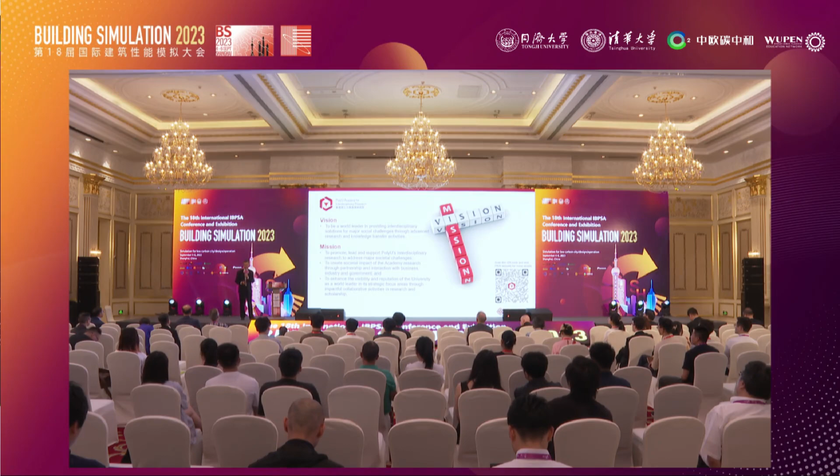This reminds me of about 35 years ago, when I was at Burgers' lab at Delft University of Technology. I asked my boss, since Burgers is a very famous scientist in fluid mechanics—the Burgers' equation—but my boss said no, that's wrong. He is not only famous in fluid mechanics; he is also famous for making a very special career. For example, he decided to teach at the University of Maryland when he was 60 years old. That really impressed me, and that's why I followed his step. I moved to Hong Kong, and I'm much older than he was.

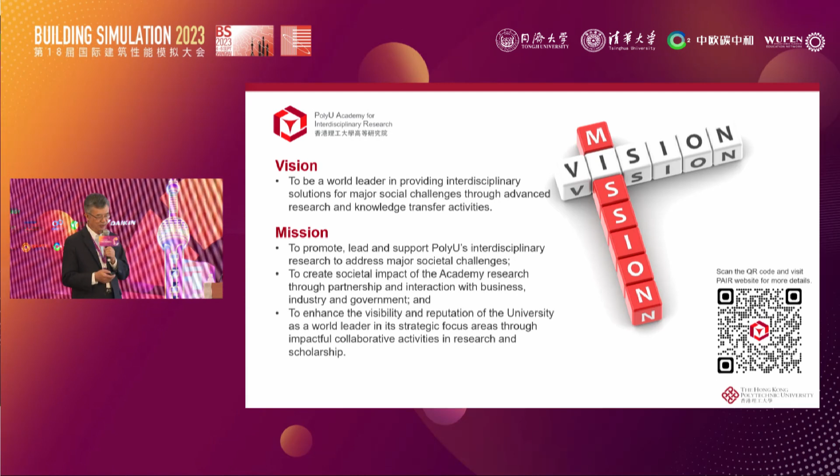So what we call PAIR tries to work on a number of different issues. Under PAIR, we currently have 11 research institutes and 6 research centers. We work on cities, advanced technologies, and well-being and health. We don't try to understand the beginning of the universe—that's often considered the problem for the University of Hong Kong. But at PolyU, we try to address the basic needs of human beings.

We say this in Chinese: 衣食住行 (clothing, food, shelter, transportation). At PAIR, we have over 500 senior researchers, and our research revenue in the past academic year was over 600 million Hong Kong dollars. That's quite a lot of money.

Now let's get started with my main talk today. I think many of you, I just met about more than four years ago, and the main reason we know each other is due to COVID-19.

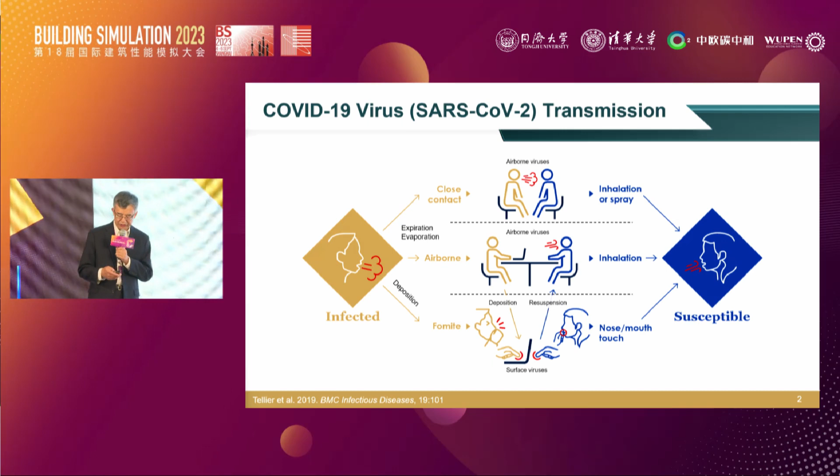If you look at COVID, in the beginning the World Health Organization and US CDC published results like this. They said, of course you should be very careful, but in the beginning they often believed that droplet transmission was the major issue. But thanks to the effort of scientists in the building science area, led by Professor Lydia Morawska from Queensland University of Technology, and Don Milton from the University of Maryland, they worked very hard to convince the World Health Organization and the CDC. As a result, a year later, these organizations changed the definition of how COVID is transmitted.

You can see from the US CDC in 2020, they changed it to say transmission is mainly through respiratory droplets produced when an infected person coughs, sneezes, and talks. So the aerosol format became a secondary effect, and that's why we believe we have a major key role here, because many of us are working on HVAC, which concerns air.

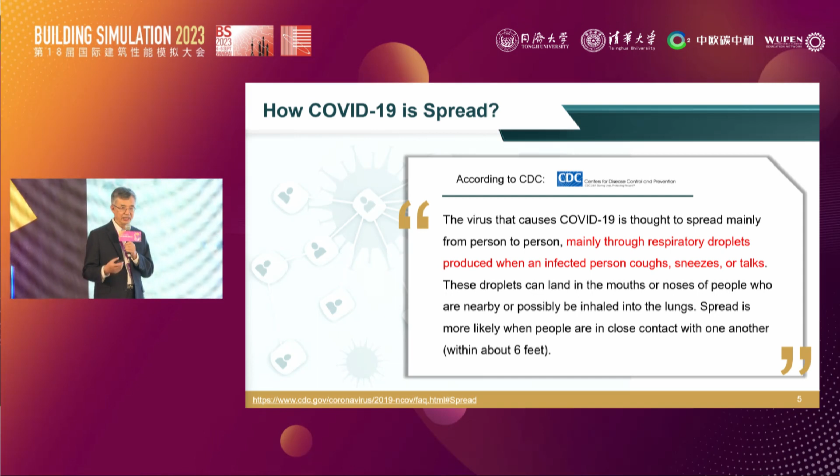Now, if you look at how the COVID-19 virus is generated, CDC already mentioned a few ways, and to be complete I'd like to list them. Of course, coughing is very important. Even in China, when restrictions were lifted, you heard coughing everywhere, and that was really a major issue. In addition, when people talk, that also causes a bigger problem. I believe in the beginning in Wuhan, many people got the disease because they had a big feast—they ate, they talked. Although there was no coughing at that time, there was still a big environment for transmission. Then breathing also releases quite a lot of virus. These are the three major ones CDC mentioned.

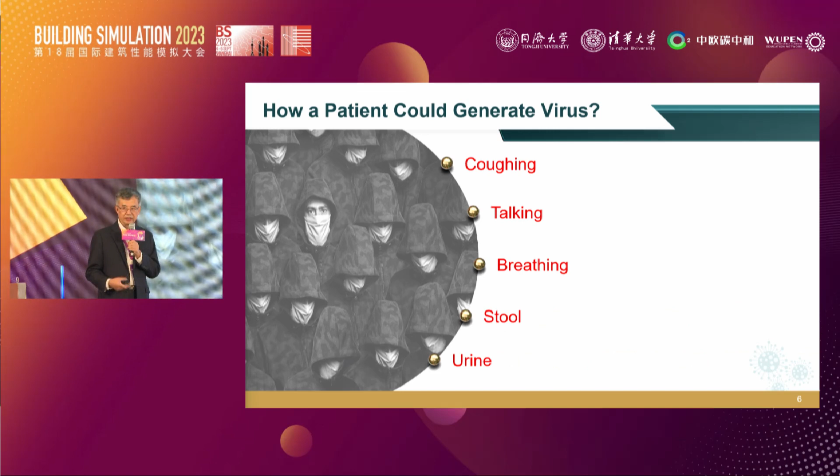In addition, virus has also been detected in stools and urine. So today I'm going to look first at the size of the virus, and then we can see why talking, coughing, and sneezing are important.

This slide shows a number of very common viruses we have. The one I circled there is SARS. So SARS started in Hong Kong in 2003, 20 years ago. And 16 years later, we have COVID, which is a similar type of virus.

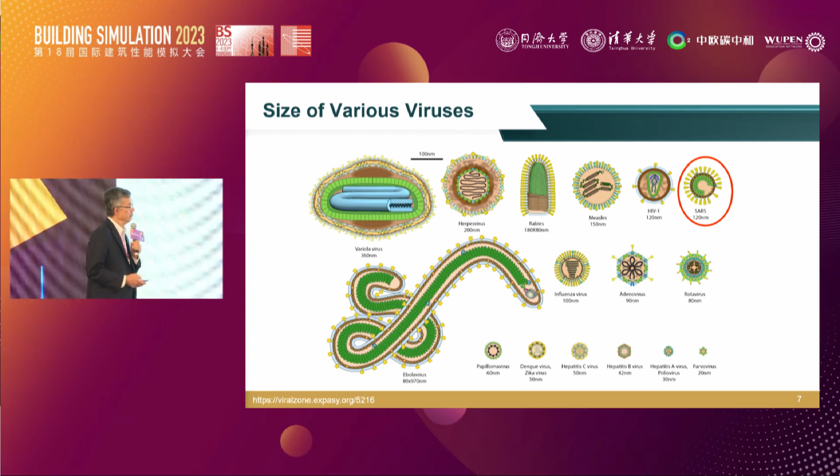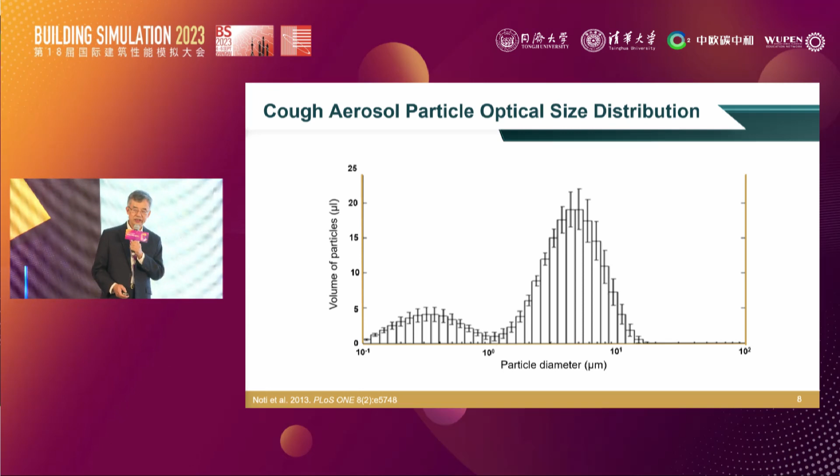It's very small, only 120 nanometers in size. But if you look at a typical cough, with particle diameter on the horizontal axis and volume on the vertical axis, you can see the majority of particles are in the size of 1 to 10 microns. That's very big because the virus is only 120 nanometers. So any size particle we generate contains a lot of virus, and that's why transmission is very easy when your virus is so small.

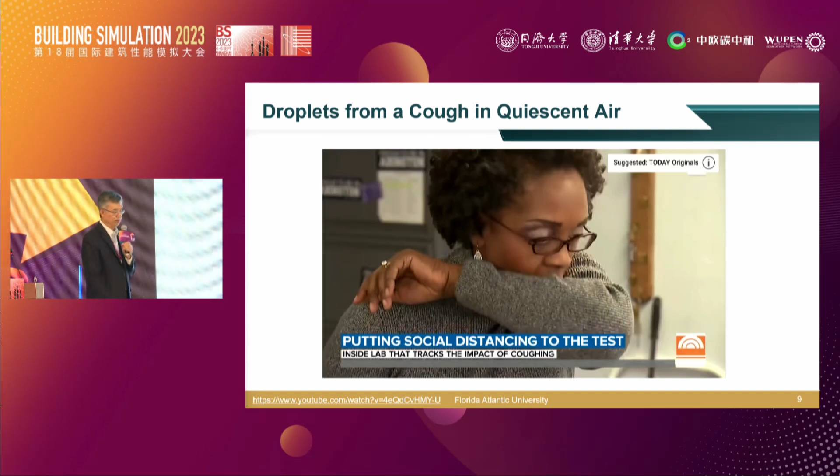Now, in the early days, this is just from TV in the US. Can somebody click that for me? Okay, this is about the cough, right?

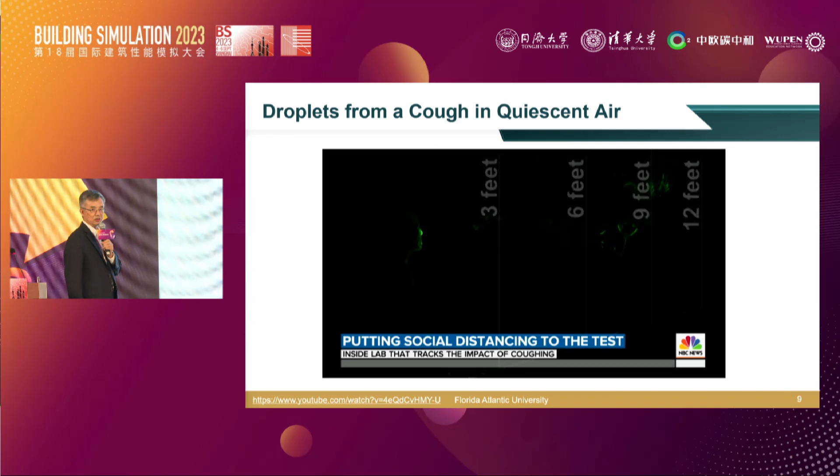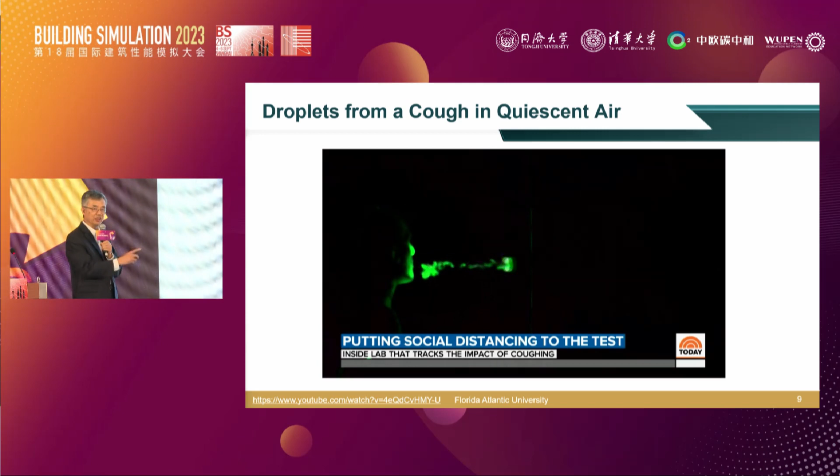In Florida Atlantic University, there was a study showing that if you cough, typically the droplet can go about 6 feet or 2 meters beyond. This is how the US CDC decided we need to maintain a social distance of 2 meters. But that's only for a very normal cough, because sometimes the cough isn't so strong and doesn't go very far, but sometimes the cough can be very strong and can go much further than 2 meters.

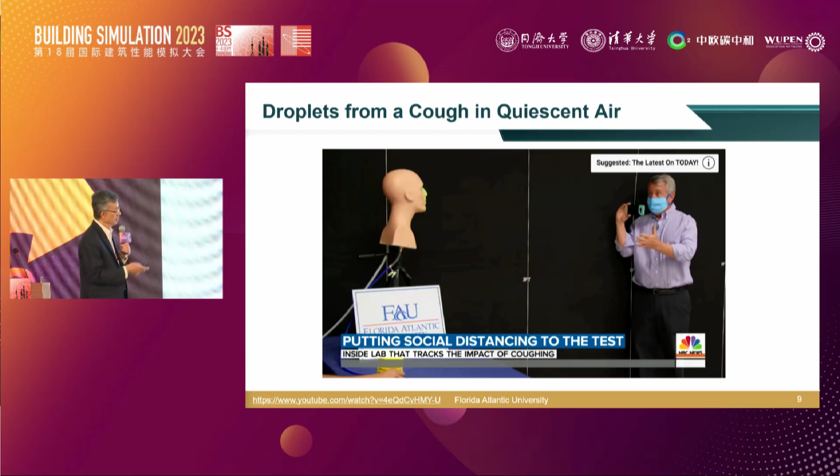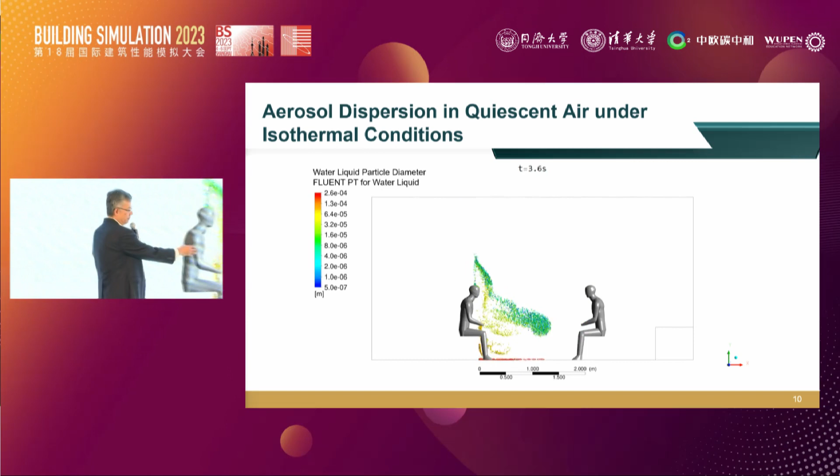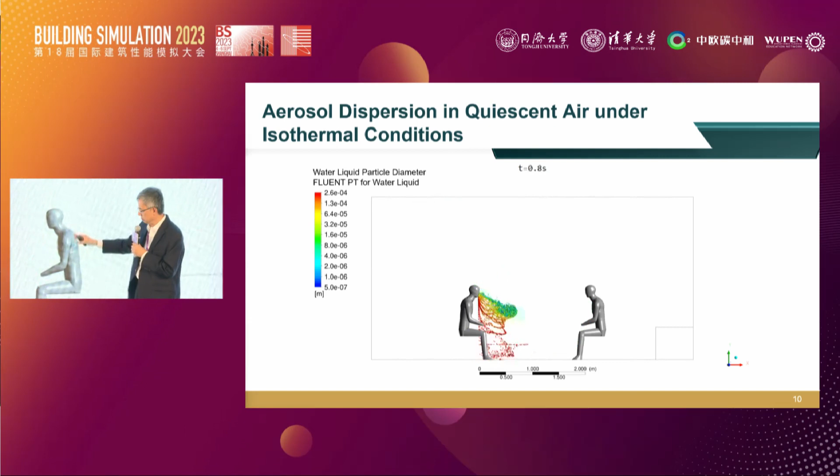So we tried to do a simulation using computational fluid dynamics, or CFD. We have one person here cough, and these different colors represent different particle sizes. Very small ones, because of thermal buoyancy, just go upwards. Larger ones, about 10 microns or so, can travel about 2 meters.

This is under a very special condition. If you look at the title, it's quiescent air, meaning the air does not move. But we are engineers, building engineers, and we study airflow. We know that even in this large conference room, air moves all the time. Therefore, maintaining this 2 meter social distancing is very difficult.

How could we change that? In the past we put some screens between two tables in a restaurant, that type of thing. But will that be useful? We can discuss later. Let's assume this is really in a room without any air movement, and the particle moves like that.

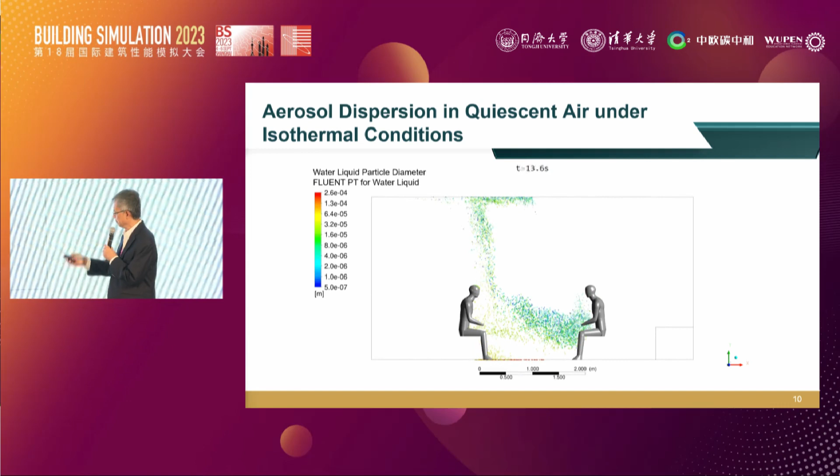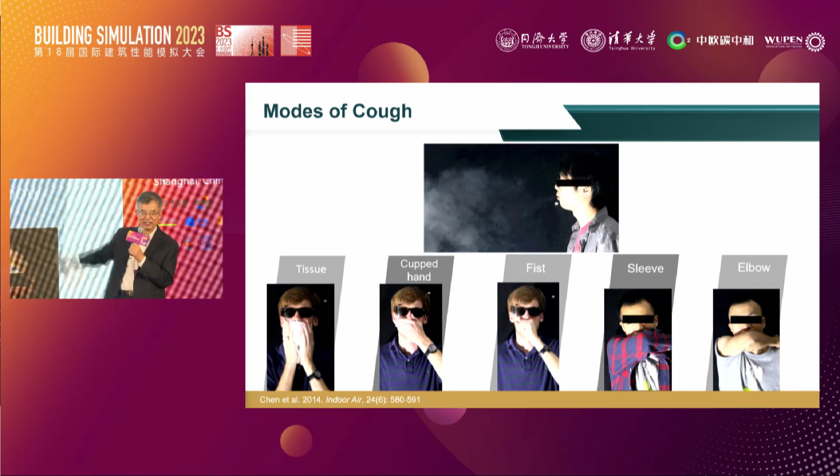The only situation you see people cough like that uncovered is when you take the airplane, if you're from America or Europe, you sit on an airplane, fall asleep, and then of course you cough like the one at the top. So those are all possible scenarios.

Now, when you cough like that, we usually use smoke to visualize it. They behave very differently. The air and droplets do not go directly to the front. Instead, they go up and down, sometimes to the left and right, and they are very different.

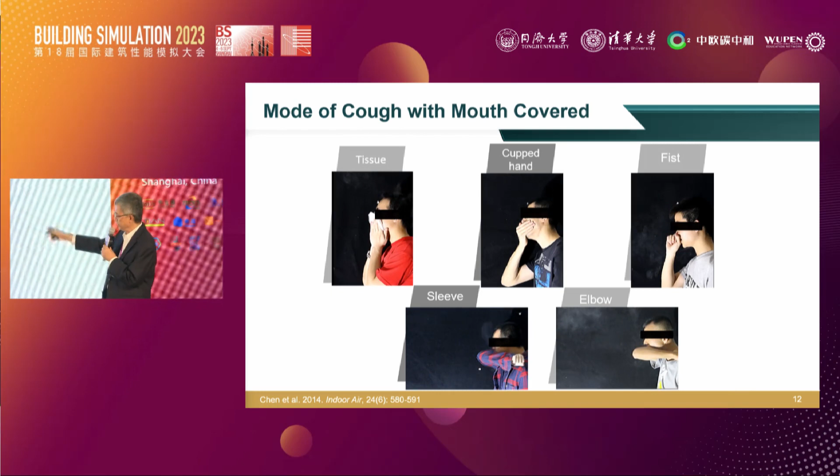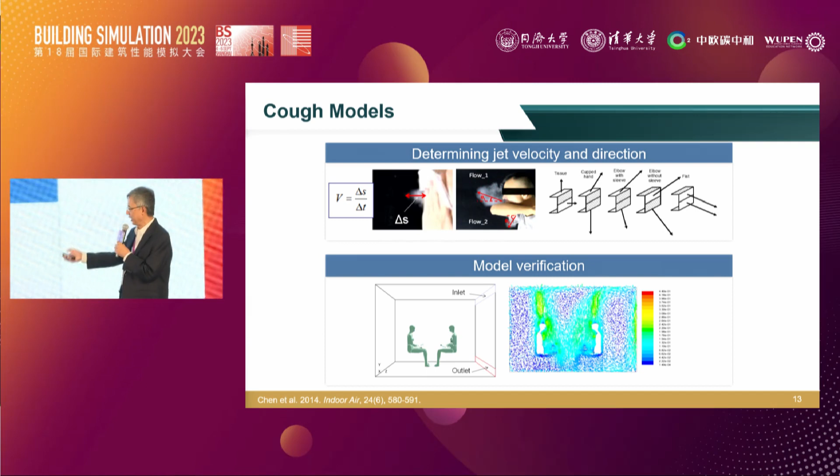Let me show you our simulation of this scenario. We usually use visualization to determine the boundary conditions, so we make different openings just to simulate a mouth. Then we put it into a typically small room, just like an office, with air coming in and going out. Because of the air from the mechanical systems and the thermal buoyancy from the human beings, the airflow pattern is very, very complex, even in this room with just 2 persons and without any furniture.

Now we look at different coughing scenarios with the air conditioning system on. The uncovered cough, the one TV normally shows you, where you cough without covering your mouth, can reach another person. But in any other scenario, the cough doesn't reach the other party, who is about 1.5 meters apart. That's the reality. But when you look at TV, they show you an unrealistic cough more or less like that uncovered scenario, and I think that's very wrong.

By saying that you need to keep 2 meters apart. Because in a lot of cases, you really see this type of transmission. And when I was in Hong Kong, many Hong Kongers are pretty short. And I have a staff who is very short, and she told me, oh, in a subway, I'm afraid to sit down. And I said, why are you afraid to sit down? She said, I'm short, and if somebody was coughing, talking, and sneezing, it will go to her face directly if she sits down.

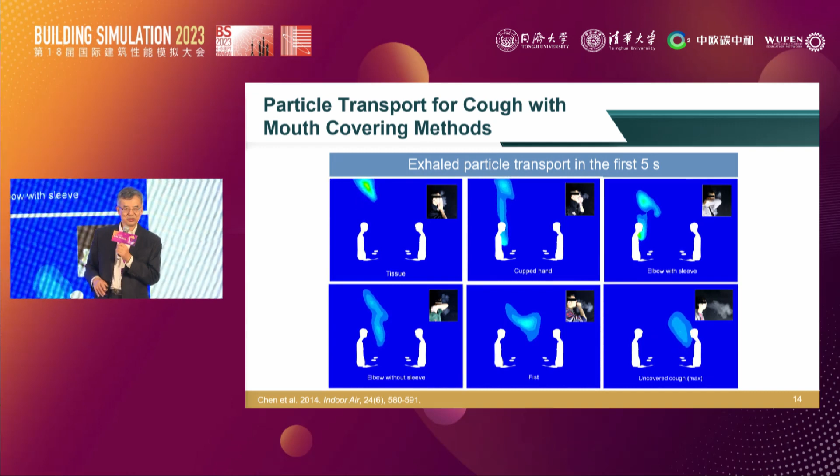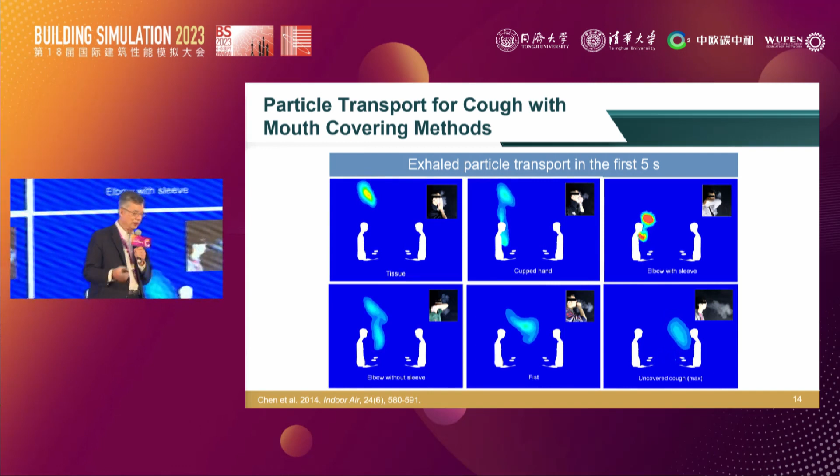I said, that's wrong. In fact, when you are short and I'm in the subway, I stand in front of this person, and that one actually goes directly to me because I'm short. Maybe my breathing level is here. So if you are short and you are in the subway, you should sit down, because all these plumes of the virus are going up due to thermal buoyancy. So this really triggers me. I think the study using fluid mechanics really makes a lot of sense. We can protect people much better.

But to determine this type of boundary conditions from your coughing, talking, sneezing is not that easy. But we can do that, right? We use flow visualization, as you can see on the left two figures. You can determine the direction. And currently, we can also use a medical device. This is a medical device. If you go to hospital, sometimes they measure how much you can breathe out. This is a very easy, accurate way.

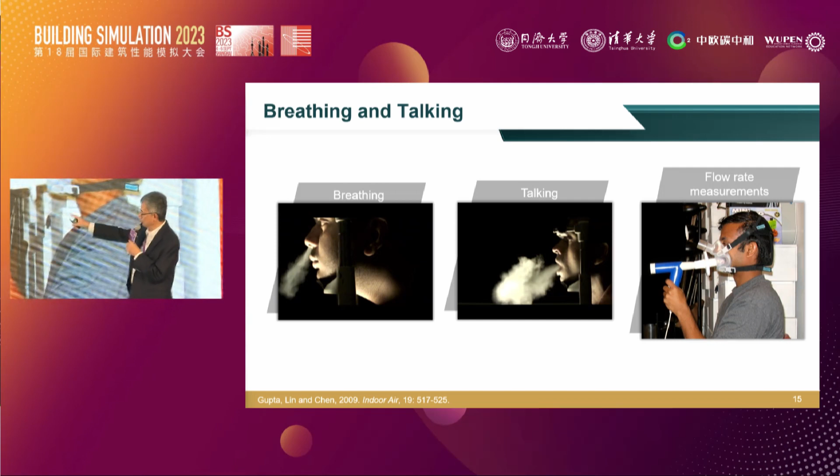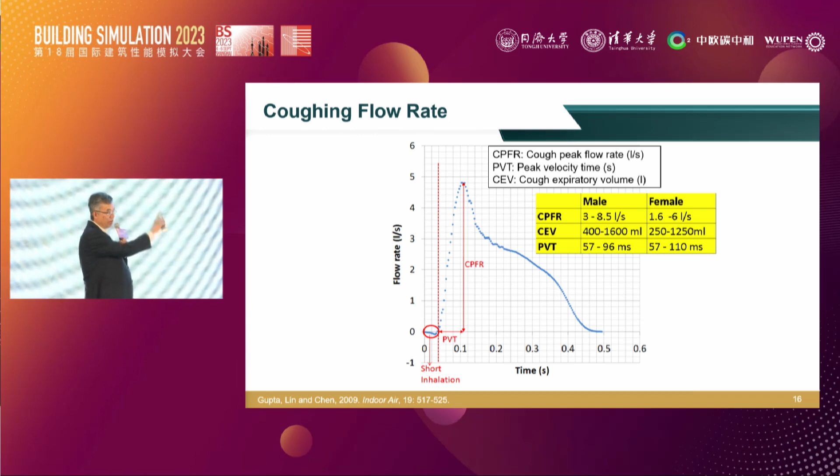So with this type of equipment, we can measure the cough. And this is a typical cough. A typical cough normally lasts about 0.5 seconds. And you can see the peak flow rate is about 5 liters per second. So you can measure very precisely the boundary conditions you need for a cough. And you can do the same thing for our breath. Typically, you think your breath is a sine function, and it is. It really looks like a sine function.

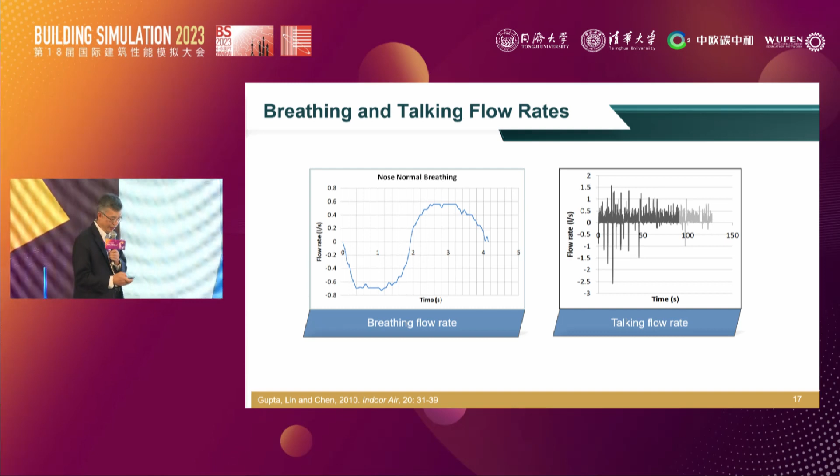The most difficult one is talking. How you talk generates a very different type of flow rate, but we still can measure it. This is a rainbow passage on the right. A rainbow passage contains all the English phonetics. So you can really see how much each phonetic produces, and then we have a result. So we can determine the flow boundary condition. Then the public health scientists can also measure how much virus is being produced, and then we have a boundary condition. Now today I'm going to use an airplane as an example, because many of you were afraid to travel during the pandemic, and I wanted to explain to you the transmission of COVID-19 in an airplane.

So in most of our airplanes, except the Boeing 787, we typically take the air from the engine, because outside the air is very cold, temperature is low, pressure is very low. So you need the engine to make it high temperature, high pressure. Then it goes through an air conditioning pack, which does the inverse Brayton cycle. You learn that in thermodynamics. And then you can make it the right temperature, right pressure, and send it into the cabin. After you send it into the cabin, the air is still very clean. So you use half of that to control the pressure in the cabin. The other half, you use this filter to refilter it, and therefore save energy. And that's the typical air conditioning system for commercial airplanes.

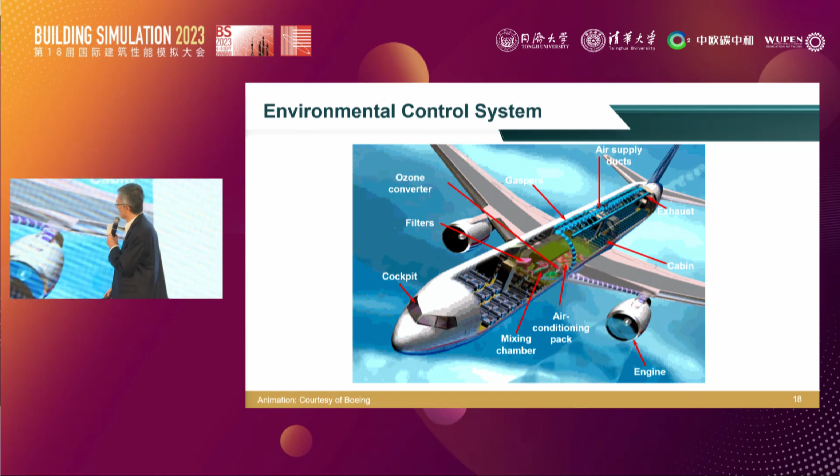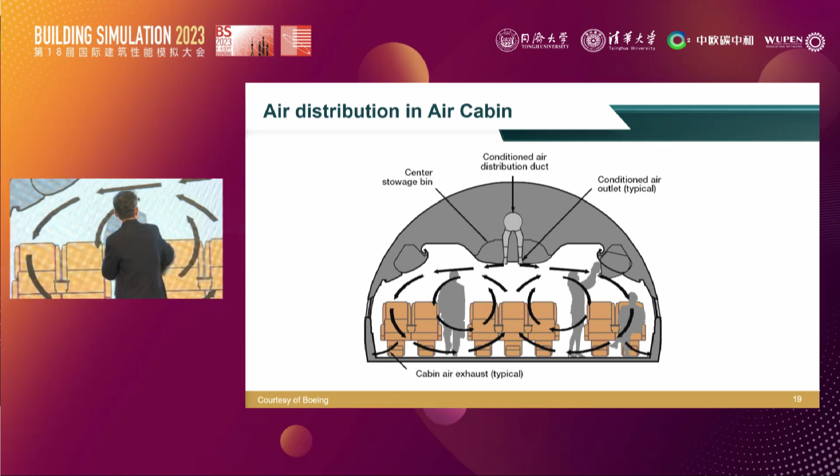Now the air, when it's sent into the cabin, we use this so-called complete mixing system. This is for a Boeing 767. The air is going like that. And for other systems, sometimes it just goes the reverse way. But anyway, all commercial airplanes use this well mixing condition. Why do you want to use well mixing conditions? Because the design of the air conditioning system is for thermal comfort reasons. You don't want temperature stratification. So to make the temperature as uniform as possible, you use this well mixing system. So it's good for thermal comfort, but it's very bad for air quality.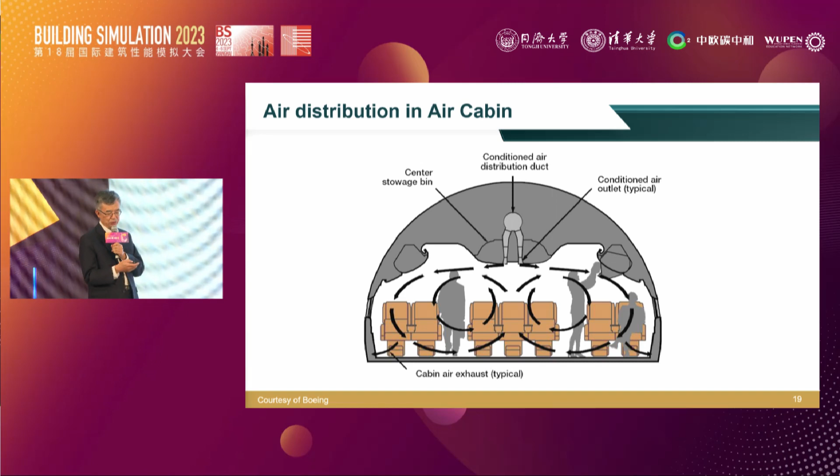Why? Because when somebody is coughing, sneezing, or whatever, this system will mix all the viruses together, and then you will breathe in the virus. So I also wanted to show you the airplane. In fact, it can be a bigger problem. So in early studies, I wanted to use this case, the SARS case.

There was an airplane from Hong Kong to Beijing in 2003. There was an infected person seated in the airplane, let's say the infected person is there, who infected more than 20 people. Those darker ones are the people who were infected. And very sadly, as a result of this 2.5-hour flight, 4 of the passengers died. This case was well studied and was reported in the New England Journal of Medicine.

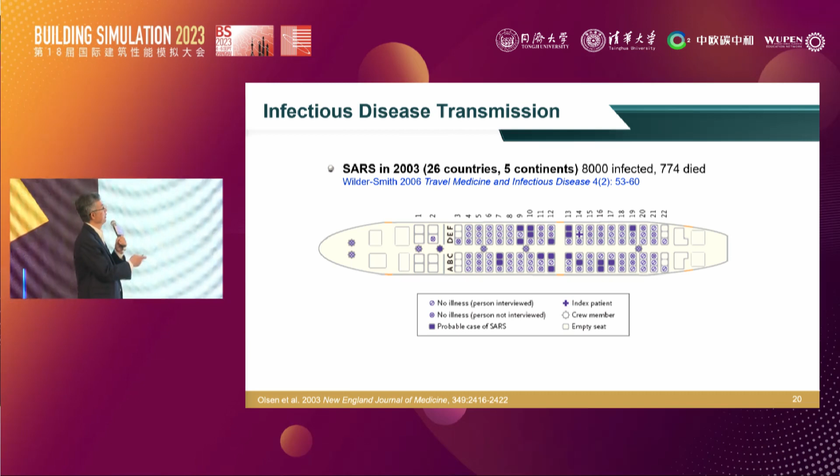Now, how can we simulate that case? We use computational fluid mechanics. We first calculate the airflow pattern, as you see on the left side. Of course, I just wanted to show you how we can get the correct result, so we use clean room data here. This is not in the airplane, right? So you can calculate the airflow pattern.

And then you can use the so-called Eulerian model. You calculate the concentration of a virus, and you can get a result like this if I put a source somewhere here, in that location. Another way is to track the movement of each particle. So I will show you the Lagrangian model. Can you play the Lagrangian model simulation?

In the Lagrangian model, you see, I have the source, there are a lot of green particles there, and they go with the air. And then you can also calculate the concentration, shown in the figures here, and the measured data. You can see that these two models give a very good result compared with the measured data. That's why we like to use this model to study the airflow and particle distributions in the airplane.

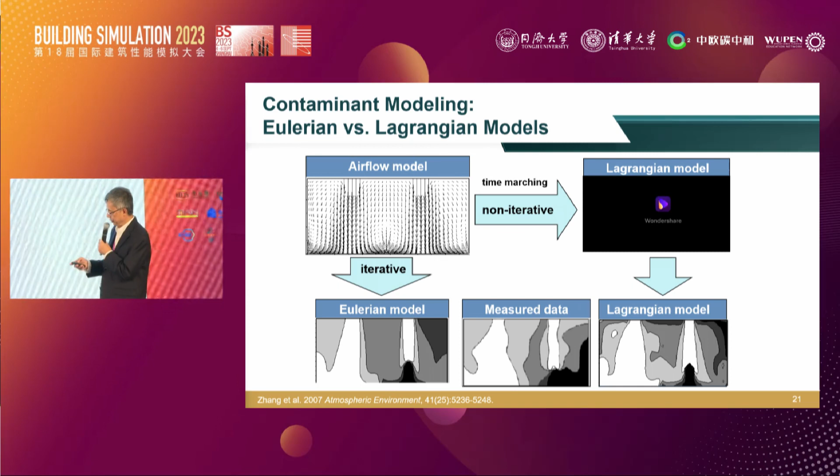So we compare the two methods in the airplane, and those are the results. The Eulerian model calculates concentration, so you always get a very smooth result. But the Lagrangian model depends on how many particles you put in. Sometimes your result is not very smooth, but they are very similar. Therefore, no matter which one, you should get a very good result.

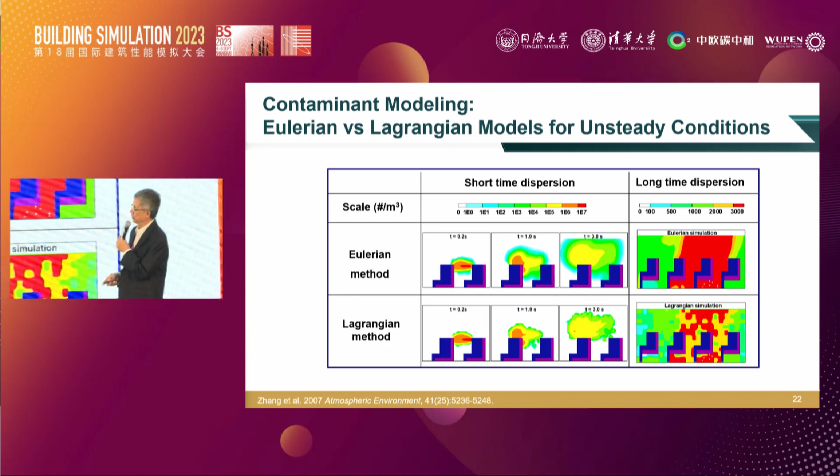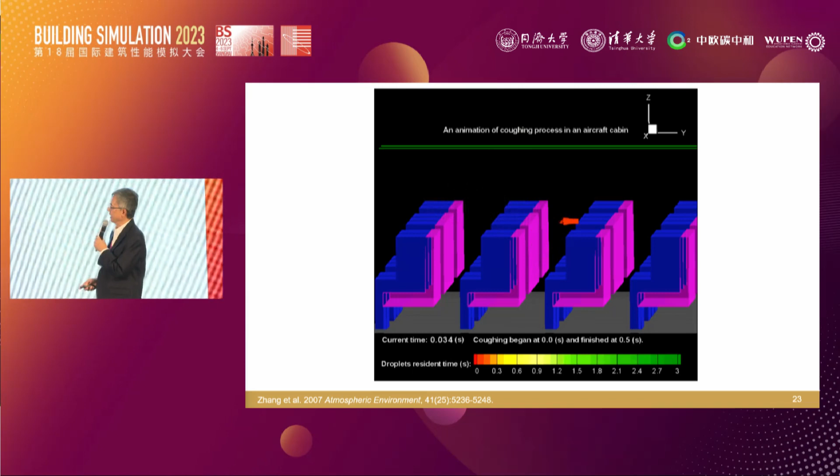And I wanted to show you, in an airplane, if somebody coughs, the particles can go like that. This is a very powerful cough. If you sleep and don't cover your mouth, you might get a result like it. But in reality, it's different. My student simulated this in a Boeing 767 model. Can somebody click this one for me? We assume there was a passenger sitting here. Can you play the movie?

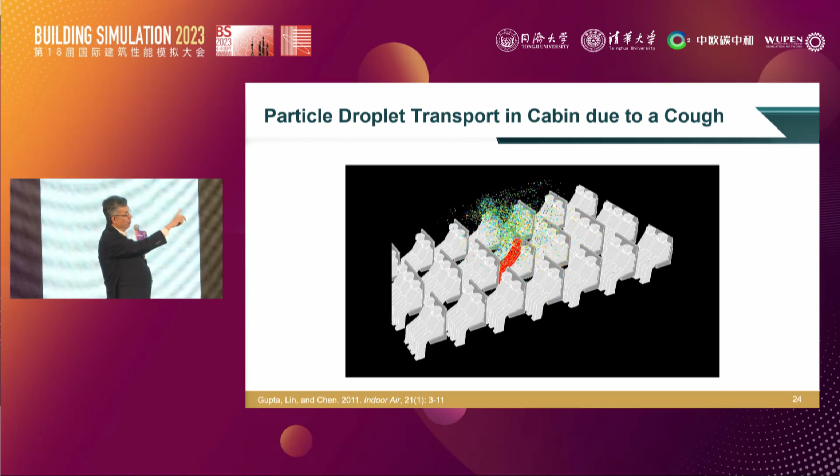So he coughs. Normally, a cough is not very powerful when you are in the airplane asleep, right? Then the particles just go on and on. It really mixes with the surrounding air. So, of course, after a while sitting in the airplane, for example from London to here, which might take about 10 hours, eventually you will find that you will be infected if you sit very close to this infected person.

So that's why the US CDC or WHO tell you not to sit too close to that person. Normally they will quarantine this row, 2 rows behind and 2 rows in front. That's typically how quarantine is done. That's still a lot of people. If you have a Boeing 747, each row is 10 people. You quarantine 5 rows, that's already 50 people. So that's not a very nice scenario.

So if my calculation is right, you will say, okay, I take even 3 rows before and 3 rows behind, and of course you find a lot of dark positions there, they are infected. However, in this scenario, there were 2 people sitting 7 rows away who still got infected. So what's the reason behind that? We suspect that somebody moving around might cause the issue.

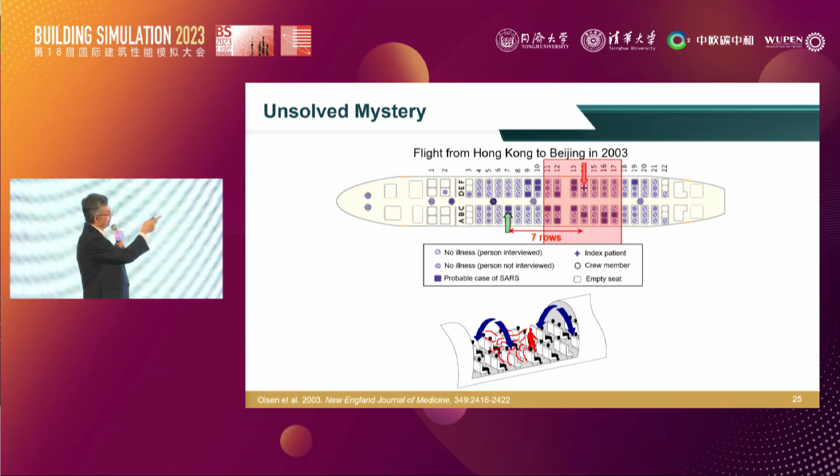So let's do a simulation, with somebody, a passenger or crew member, walking along the aisle. Here is the result. The infected person sits in that location, and then somebody was walking, going further, 7 rows down here, and then stopped here, and you can see the virus does transfer to the 2 passengers there.

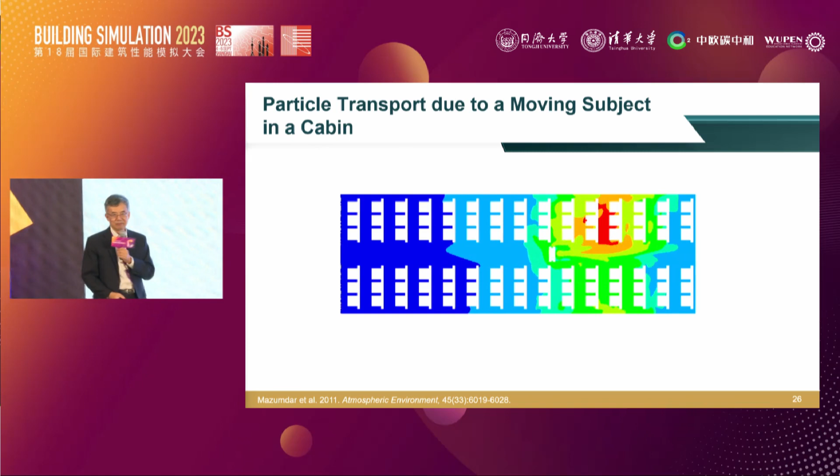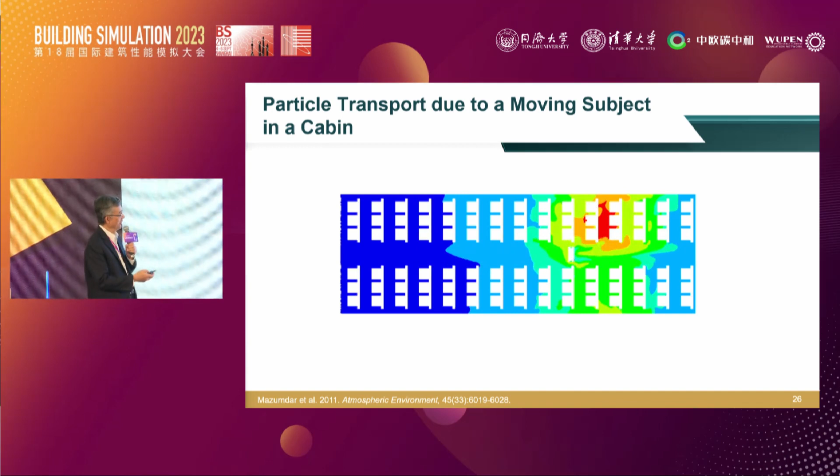Of course, this is just one possible scenario. You might believe it or not, that's your judgment. But we believe this is an interesting result. This was the old result, even before COVID-19. Now, with COVID-19, we have new data, so we needed to make sure we can simulate a good result. We have to use data from COVID-19 because SARS is very different from COVID-19. And there was a study done before on different coughing.

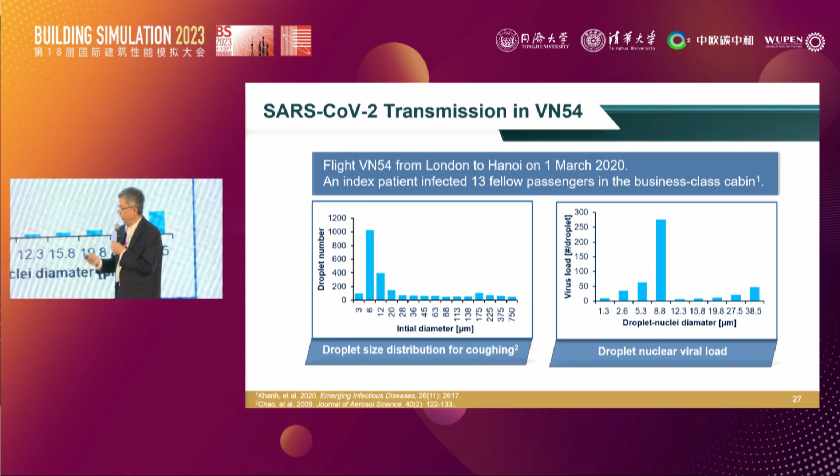Okay, so when you cough, you have different sizes of droplets, right? Let's say in terms of diameter, and that's the number. And then in each size, they also measure how much virus is there, so you can also determine the total virus copies inside. So with that information, we can simulate a scenario. This is a real scenario.

This is a Vietnamese airline, Flight 54 from London to Hanoi in 2020, very early. This is a Boeing 787 commercial airplane. That's a business class cabin. So the passenger sitting in this position was the index patient. Can you play the animation? So we assume, because at that time nobody wore any masks, because in the beginning nobody knew there was COVID, right? So that person was sitting in an airplane.

Oops. What's going on? Okay.

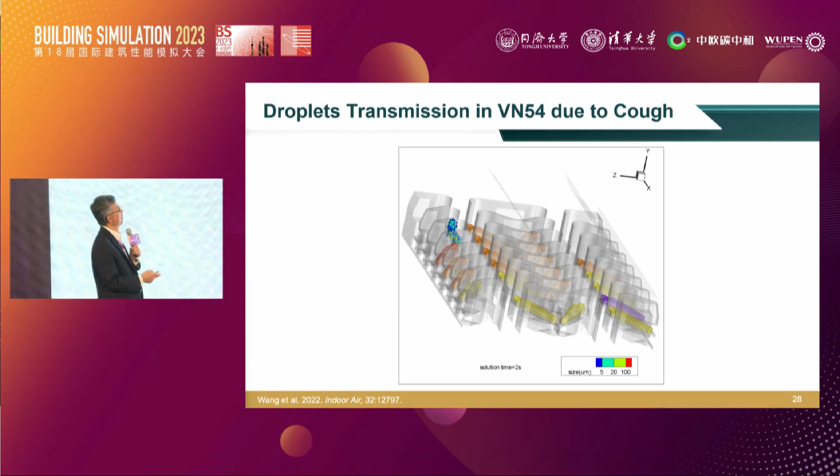Anyway, you see this flow is moving around. So as a result, the index passenger is at 5K. And this is a business class cabin, so the double aisles here, that's row 1. So you can see different colors. The yellow one was not infected. Then this purple color, there was no information because they couldn't find the passenger.

But all these brown color were infected. Quite a number of people, just one patient, right? Almost infected the entire business class cabin. And this is a 12-hour flight from London to Hanoi. And the public health scientists provided us the information: if you inhale more than 1,000 virus copies, you will get COVID. So we use that one as an example, right? Then this is how this one corresponds to that result.

And sorry, we did the simulation, and this is our simulated result. So we find those people will get infected, and some of them will not get infected. We don't really get 100% right, but we get 87% right. So this just uses a real case to verify that this method can be used.

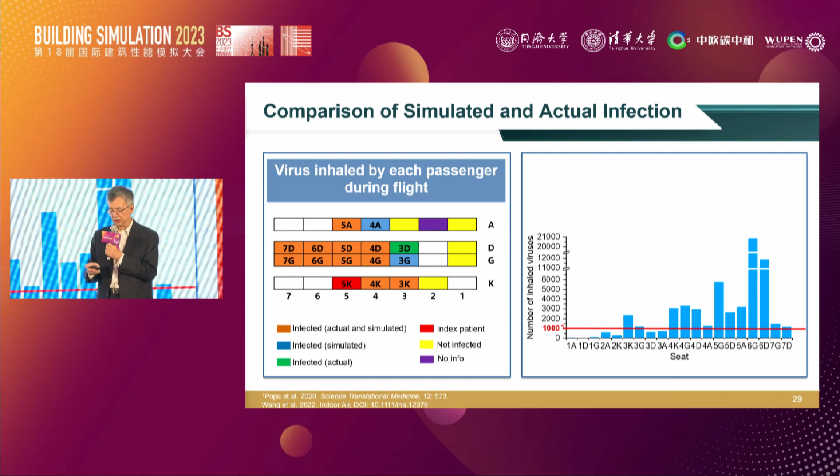We also simulated another one I didn't show here, the flight from Singapore to Hangzhou in 2020. In that airplane, only one person was infected, and the others were not. And the main difference is that from Singapore to Hangzhou, almost all the passengers wore masks, although there were 4 index patients. So wearing masks makes a lot of difference.

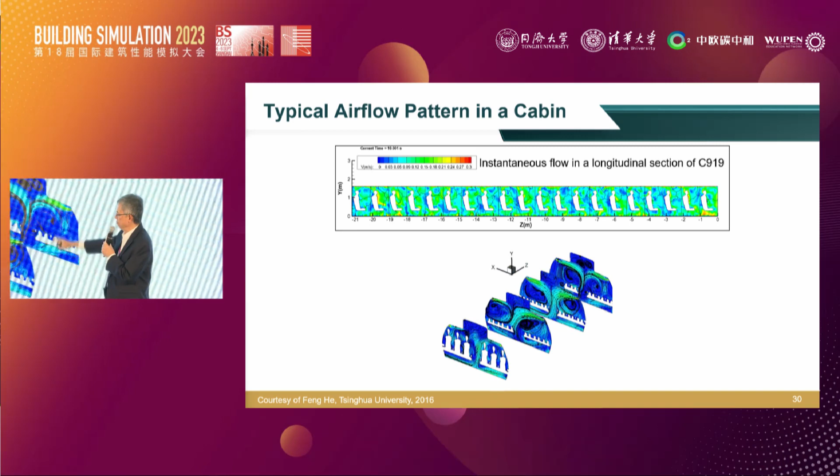But of course, in the airplane, the airflow pattern is super complex. I just showed you, this is the Chinese new airplane, C919. And we just randomly take a few rows here. You see, even though the boundary conditions look the same, their airflow patterns always look very complicated. So to make sure our result is really true,

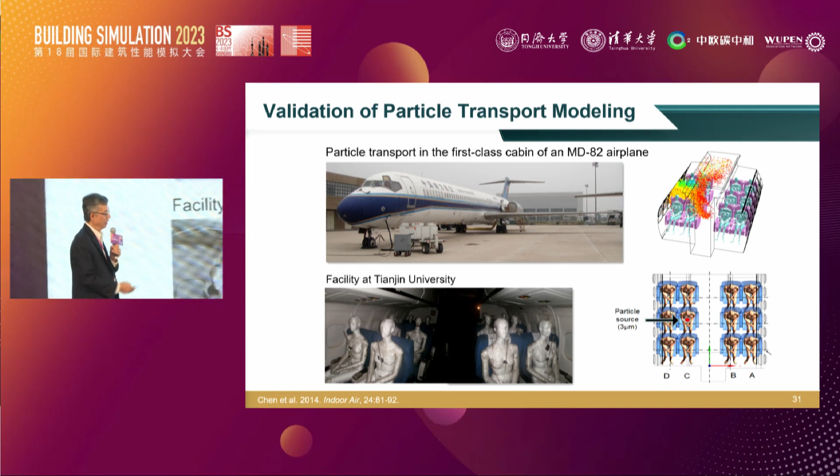we used a real commercial airplane, and this is an old airplane. It's an MD-82, and in the first class cabin, we have just one mannequin which generates the particles, and then we can measure the distribution. Let's say the first class cabin has 3 rows. So we measure the result, and then we also use the CFD simulation.

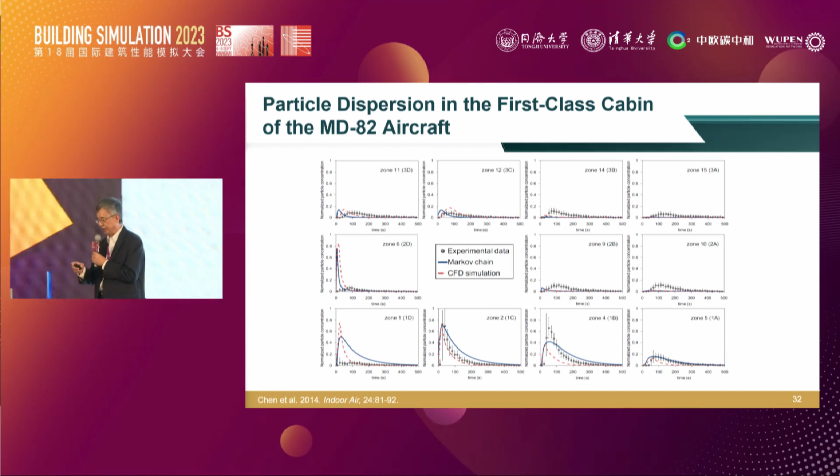You probably just need to look at the result of this one and that one. You get a very similar result. So no matter if it's a real case or a lab case, we got a very similar result. So we believe this is a good model to do the prediction. And therefore, we can also calculate this based not only on the virus copies. At Harvard University, Professor Wells developed the Wells-Riley equation, which can also be used to predict the infection. And we find a very similar result.

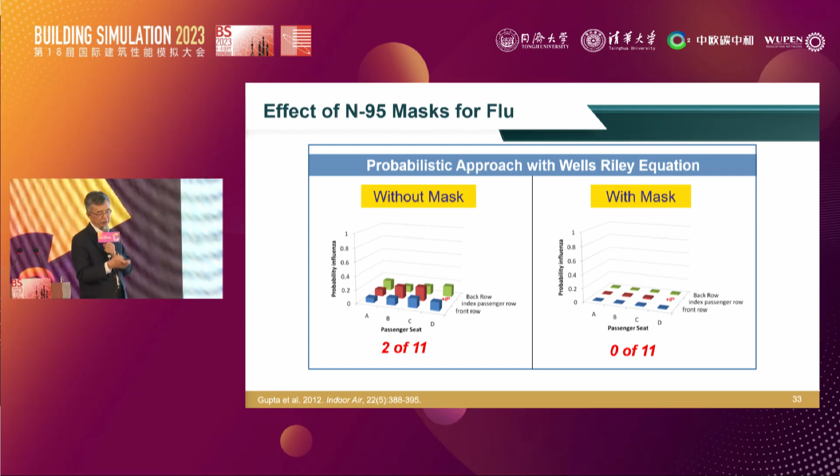Now let's go back to the mask, because I mentioned to you, masks can be very important, right? In the beginning of COVID, there were no masks available on the market. Everyone was really looking for masks, but no masks were sold, and therefore the US CDC said, okay, use whatever you have. Best is the N95 mask. If it's not available, try the surgical mask. If you cannot even buy surgical masks, then use a bandana; that might help.

But of course, the efficiency is very different. This is not our study. Early studies show different efficiency. For N95, your efficiency could be 90%. For surgical mask, it's about 30%. And for bandana, it's about 10%. But 10% is better than nothing.

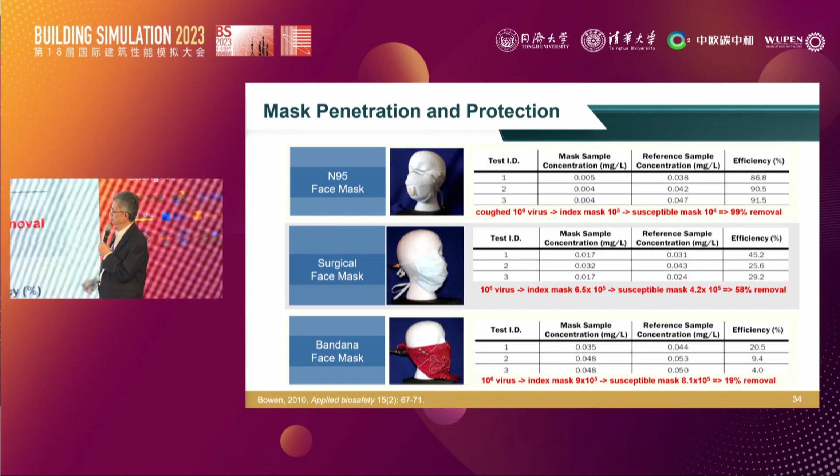So we did a really rough calculation. If you have a million viruses generated, how much can be removed by wearing different masks? And we calculated it using N95, combining the effect, I mean, the index patient and yourself both wear N95. You can remove 99%. With surgical masks, 58%, and with bandanas, 20%.

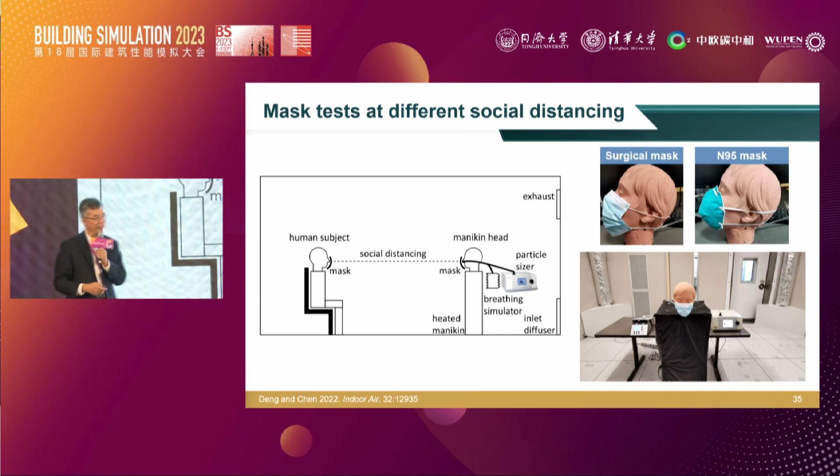But we doubt if the result will be so good. So therefore, in my lab, we use a mannequin and a real person to do the experiment. We use a real person, a human subject, to generate particles with a mask. Then we use a manikin and a breathing simulator to see how much you really inhale.

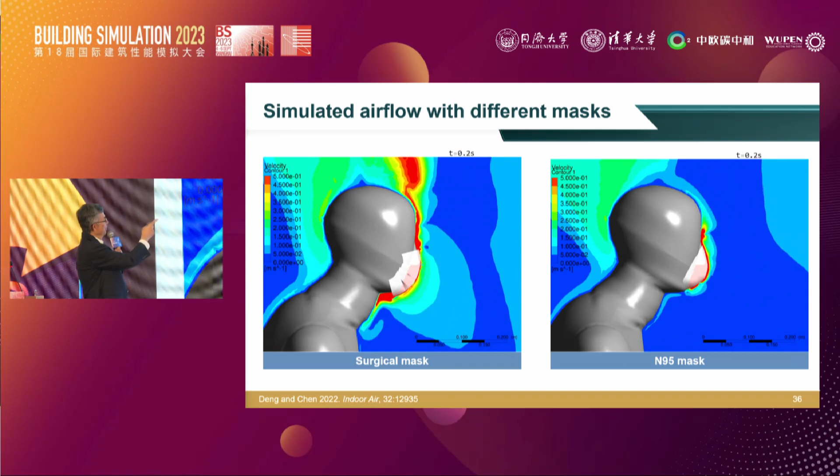So this is the result. Surgical mask on the left, N95 mask on the right. You definitely see very different results. N95 is much better than surgical mask because the red color means a very high velocity, and it also means a lot of leakages.

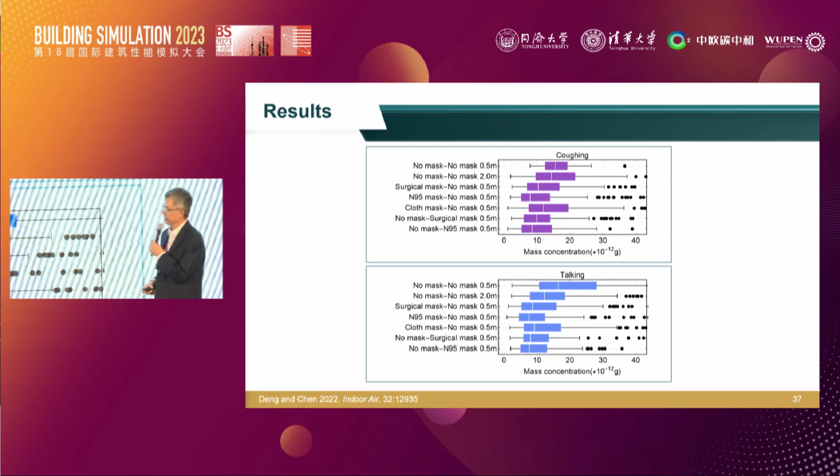In the beginning, you remember they just tried to not sell the middle seat. That is not very useful. We said make sure everyone wears a mask, that will be helpful. And that's why, in the later stage, they just gave you masks rather than blocking the middle seat.

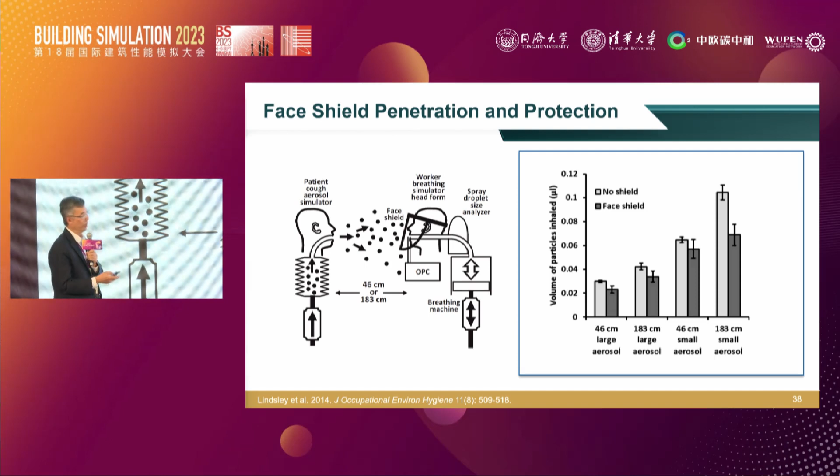Also, in the beginning, people used face shields. Even when I taught at Purdue University at that time, they gave me a face shield to continue teaching. But we said this is not very useful. This result isn't from our research, but I wanted to show you results done by other people, with the reference at the bottom. It's not very useful, only for very small aerosols. Otherwise, the face shield gives you false protection.

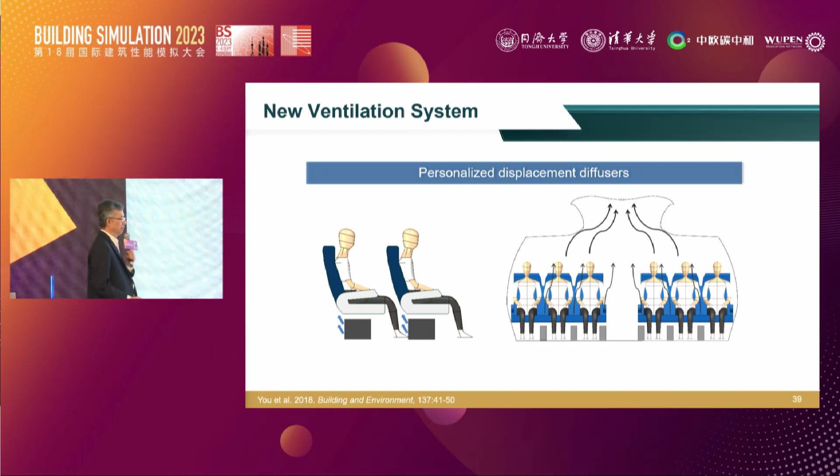Now you have the problem. Can you solve the problem? I wanted to see how we could solve it, so we tried to develop a new type of ventilation system. Put the ventilator in front of your seat, but not exactly in front, because all of you know your leg room is very important—you want to put your legs in front of the seat. So we put the diffuser somewhere in between.

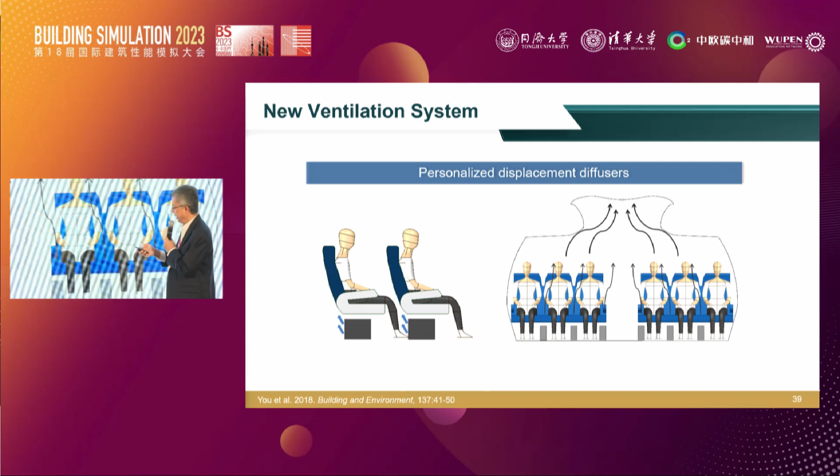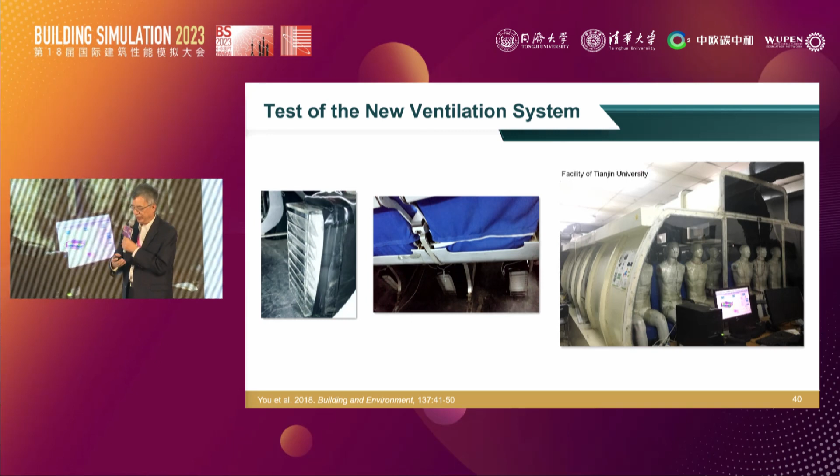Normally you see there are a lot of electronic boxes there. We separate the air using displacement ventilation, and instead of complete mixing, we try to extract the air at the top. This is how the real physical system in our lab looks, and we implemented this into a cabin mock-up. As a result, I wanted to show you this.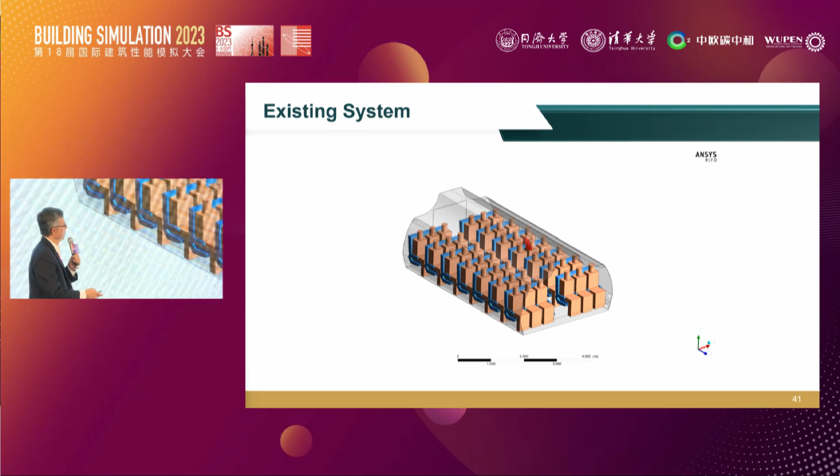This is the old system, and now this is the new system. The new system's particles don't go everywhere—they're mainly extracted by the outlet. So we think this should be the future system. We also compared it with the current system over the long term: blue means low risk of infection, red means high risk. The current system has a higher risk.

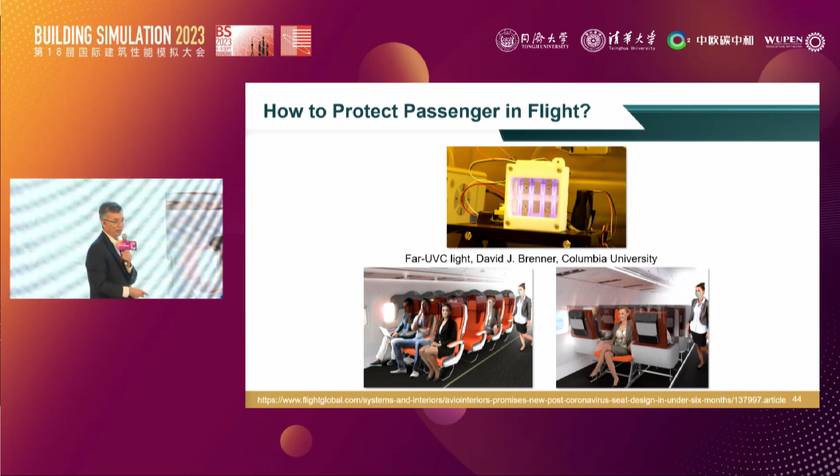Later on, other researchers, for example from Columbia University, invented this UV system. This UV is not harmful to your eyes, so they can put it into the cabin. Then some other designers designed different shields to try to block particle transmission. Quite a lot of other effort as well.

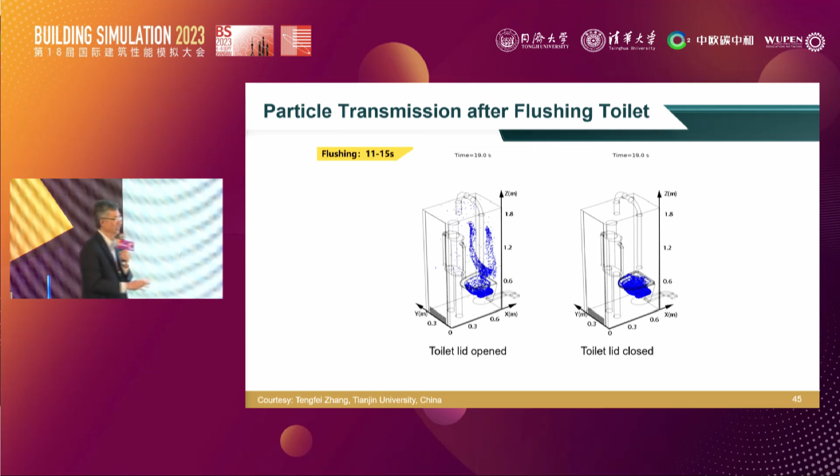One more thing I wanted to emphasize—this is research done by my former student, Tengfei, on the airplane toilet. A lot of health organizations tell you to close the toilet lid when you flush. These are two scenarios: one with the lid open, another with the lid closed. The particle transmission is very different. Someone may argue with me, it's your own stool, why do you care? Of course, at your home, that's all your own stuff.

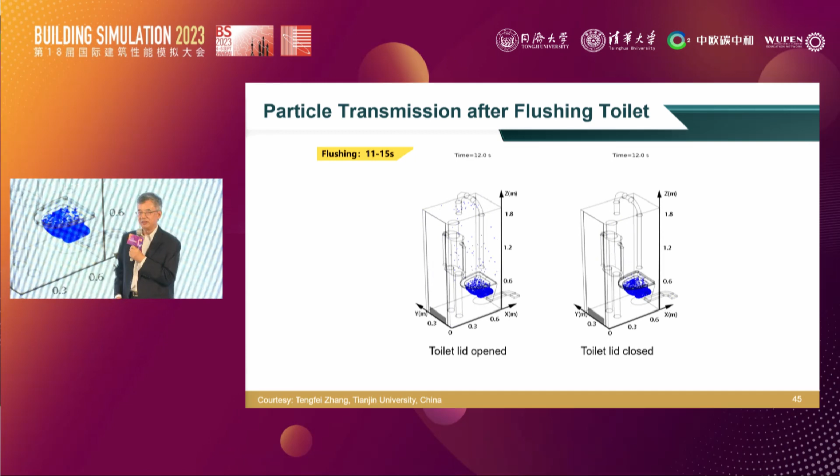But if you are in an airplane, it matters a lot, because people often wait to get into the toilet. If you leave it open like on the left, then the next person getting in might get infected. We call this fecal-oral transmission, which might be possible in that case.

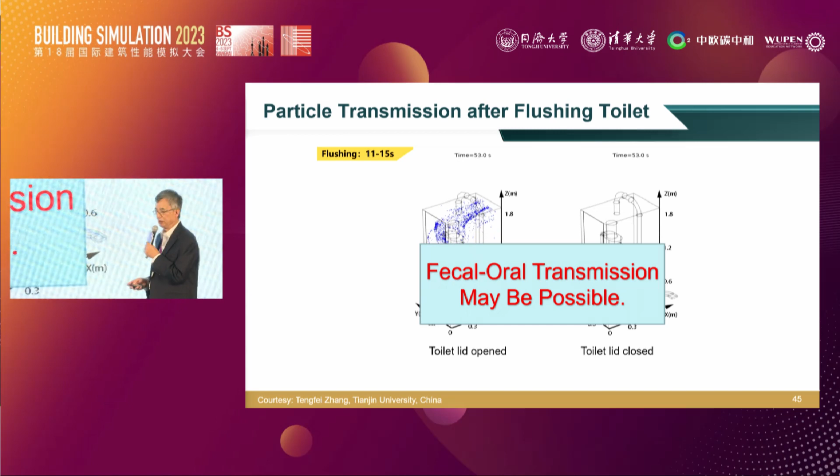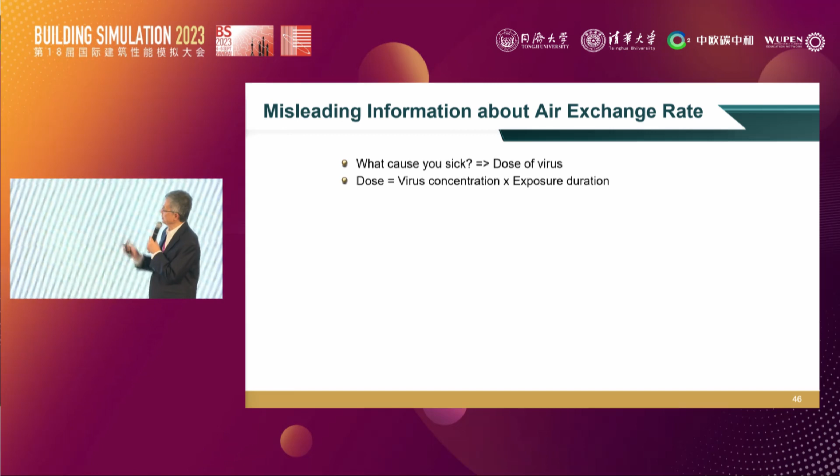So to conclude my talk, I wanted to mention a few things. The virus dose is very important. The virus concentration times the exposure duration is also important. If you take a plane for 30 minutes versus 12 hours, they are different. So the dose is the concentration times the exposure time, but the air exchange rate is not in the equation.

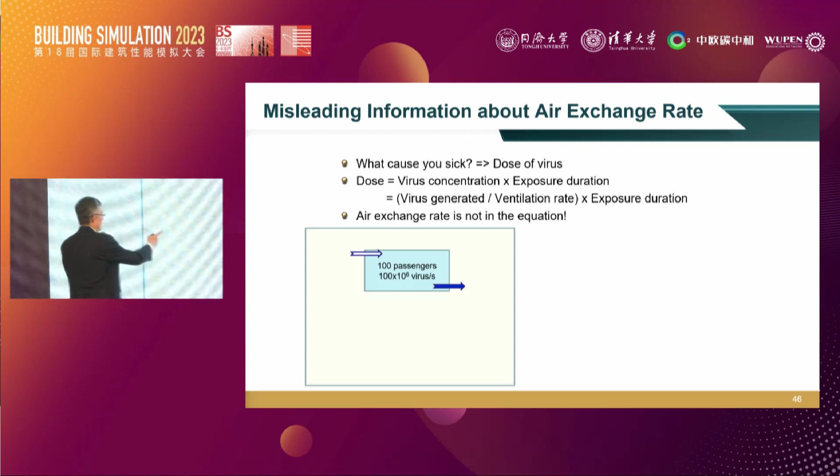Many airlines during the pandemic always tell you air exchange rate is 20 or 30 times per hour, so the airplane is very clean. That's not true. I always give them this example: I have 100 passengers and each passenger generates so many viruses. If you look at a 10 liter per person ventilation rate, you can easily calculate the concentration. In this case, if the cabin volume is 180 cubic meters, the air change rate is very high, 20 times.

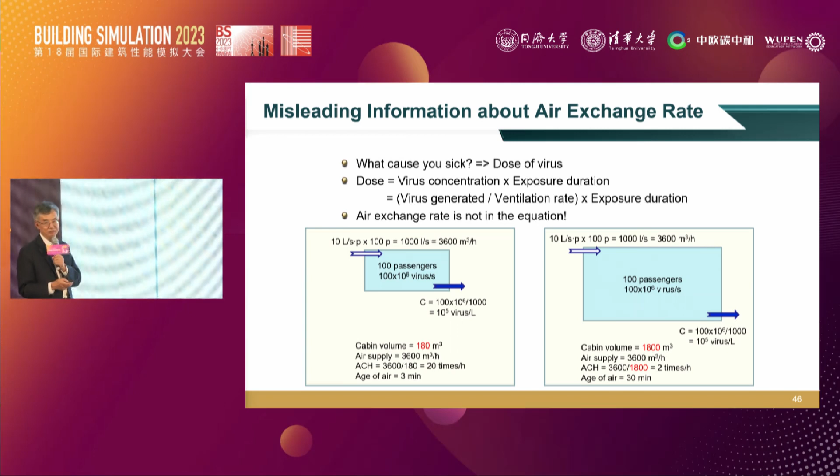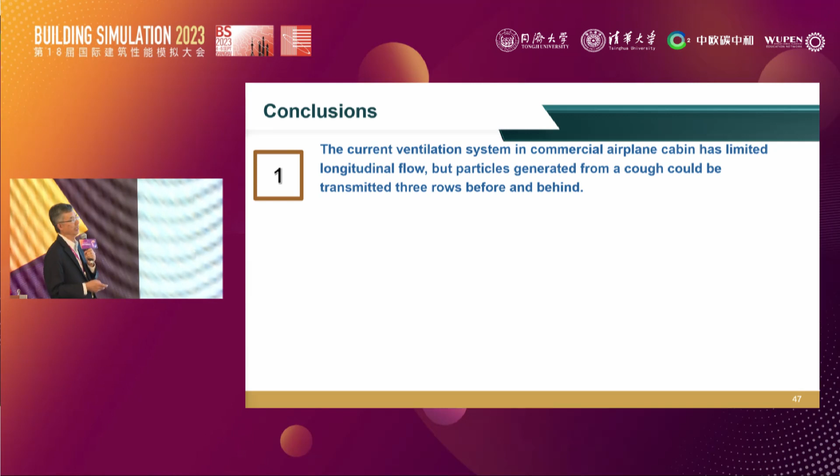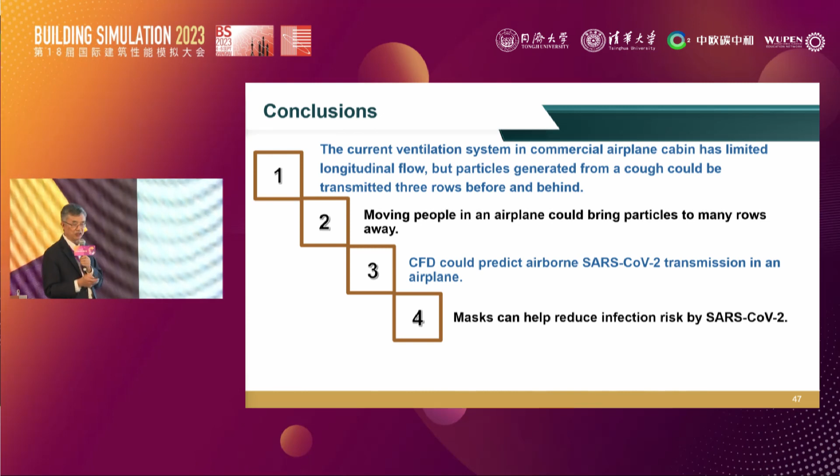So to conclude, today I showed you the current ventilation system in commercial airplanes has a very limited longitudinal flow, but particles can be generated and transported quite a lot in the cabin. Also, moving people can play an important role in the air cabin. We use CFD, which can really calculate virus transmission. Masks are actually more helpful than social distancing. I believe we can do something by using new ventilation systems. Thank you very much.